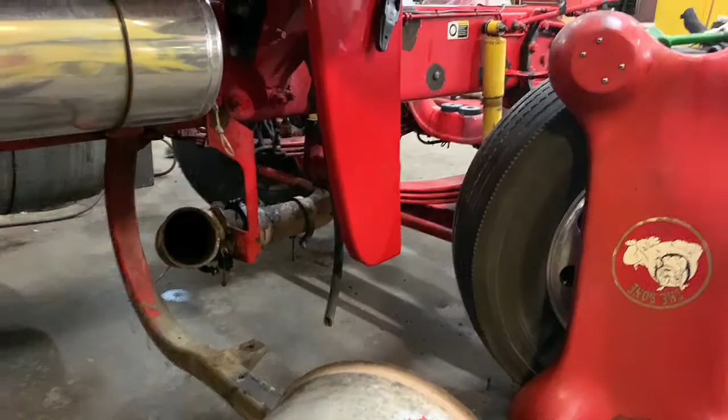Here we go, this is about as bad as it gets. This guy had some major engine problems, which we took care of. We're going to swing around to the front where you'll see he had antifreeze going into it, that red ELC, that's why the red staining there and the plugging and the white clumping.

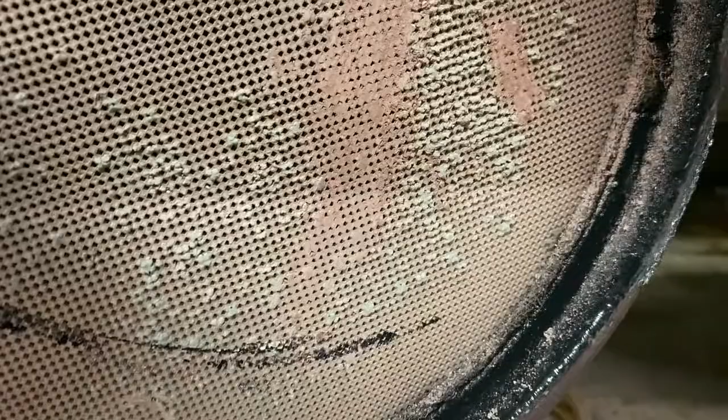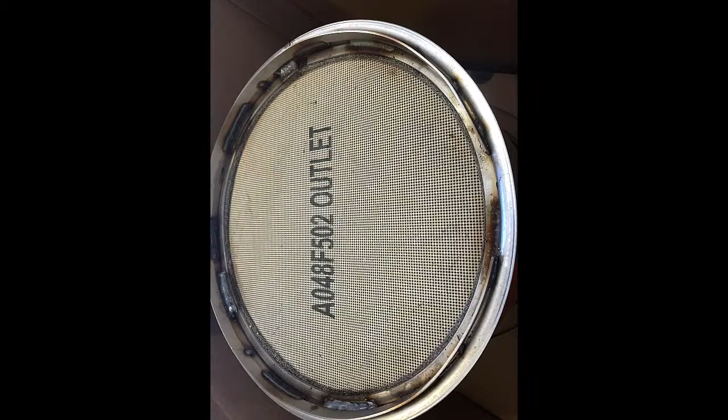We fixed them up. This is what a new aftertreatment element looks like. This one's setting up on top of the outlet can. There's the face of it. It's okay if there's writing on it. It's okay if it's white or pink. It's okay if there's burn marks where the welding is on the edges.

On the top left, the pink, that's what a new element from Cummins Recon might look like. That's fine. The second one down is what you see in the newer trucks like the 2350s and 2450s. They've gone to a different substrate. I think it's much tougher than the other was.

Number 5, which is yellow, is the DPF inlet. It has a lot of oil ash on it. If it cleans up, if you have it cleaned and it cleans up okay and it passes, you could reuse that.

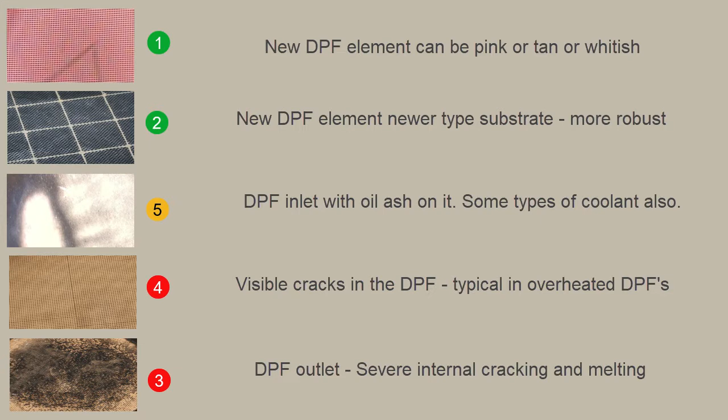Number 4, red's got a crack right across the face of it. You can see that vertical crack. If it's cracked on the face on the outlet, the inside's really bad. And number 3 on the bottom, that's really bad. That's the outlet after we pulled it out, and there's soot staining all over the face of it because the cells are all broken internally.

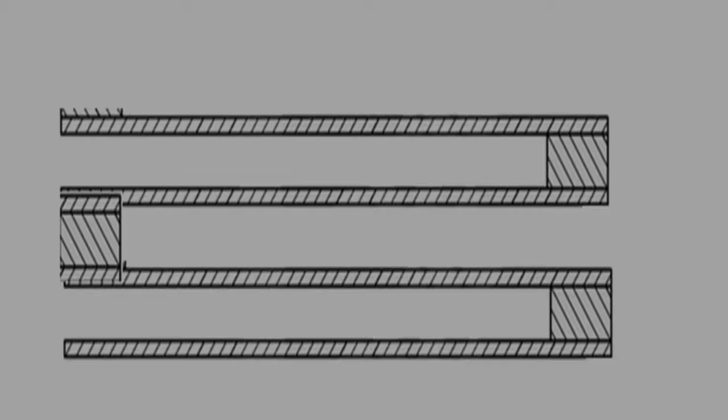This is an illustration of what a good DPF would look like. These are the individual cells, and you can see on the end, they're blocked on one end, open on the other. Those small lines on the sides of walls are the porosity that the gas goes through, but the soot can't. So that DPF we just looked at where the outlet was all soot stained, that's what the cells in this would look like. And you can see on the left, that would be soot particles coming in, but the cell walls are cracked, so the soot particles go right on down and out the other end.

Remember, in a DPF, on both ends, there's open cells and there's closed cells. So if you lay the DPF down, on the left end, all the open cells, on the right end, those cells are closed. On the right, all the open cells, on the left side, they're closed. And that makes the gas go in and exchange through the porous walls. That's how the soot is caught. Here, because of the big cracks, the soot goes right on out.

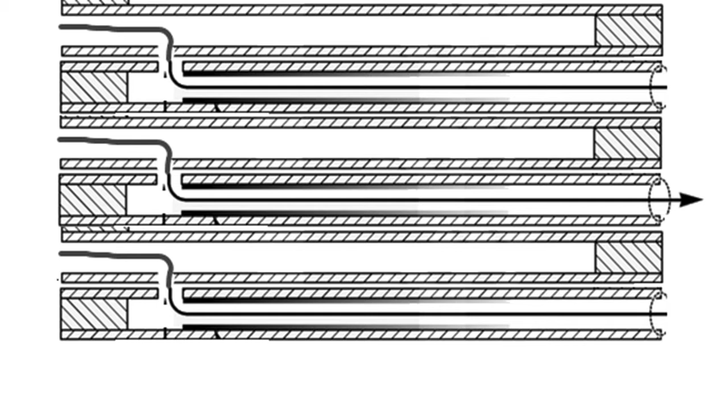So this is called breached. So we just looked at those cracked cells. Let's see what happens that those cells get cracked like that.

So you're running along, and for some reason the engine's making more soot than it's supposed to make. And what happens is the unit's not in a regen, but the exhaust temperatures are hot enough for it to start cleaning itself. So the DOC's warming up because soot touches the DOC and it's fuel, partially burned fuel, and it burns. So the DOC starts making heat when the engine's running smoky.

And then the DPF is loading up quickly with soot. So the system, once it reaches about 850 to 900 degrees, that soot starts to ignite. When you get up to about 1040, it's ready to go. That soot's ready to burn. It's hot enough.

And it will take off, and the engine will try to control the temperature by doing some things with the turbo to cool the exhaust down, to try to cut the oxygen back there. But it happens pretty fast. So I've seen in the fault snapshots, I saw one time 1490 degrees. And if it gets that hot, you're going to have cracked cells happen.

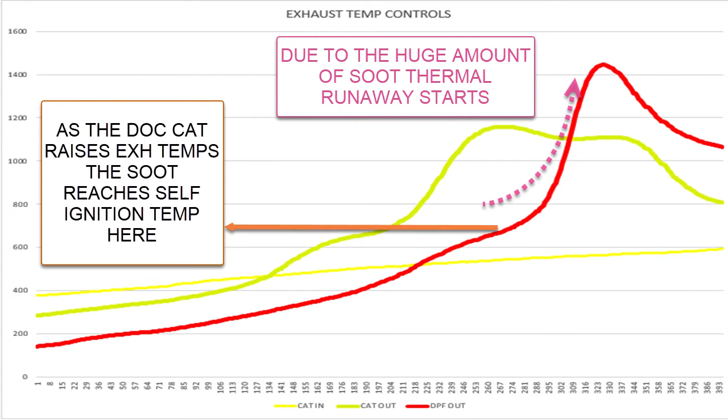So that's why you need to understand what you're looking at when you're inspecting the DPF, and that's why you need to watch those fault codes, because the engine will log faults for exhaust over temperature when this first starts, and if you catch them early, sometimes you can stop from having a very expensive repair.

Okay, what you need to know. On the ISX 871, the 4 fault codes that relate to the DPF are 2639, and that's a fault code that doesn't turn a light on. The ECM has to have a fault code go active for the software to do something or take an action.

So if they want the engine to go into the mode where it will passively regen the aftertreatment by heating it up, and by the way, you usually got to be on the freeway, or I should say going over 45 miles an hour consistently for about 15 minutes loaded to get enough heat in the exhaust system for it to do a passive regen.

If the engine's running properly, it might take a week of running before there's enough soot to change the pressure differential across that element enough where 2639 will go active. Remember, it doesn't drive a dash light. The driver has no idea this is happening. The turbo will do a little change, the fueling will change a little bit, but he won't lose any power.

Some guys can notice the way the engine feels that it's in a regen. The newer engines, they can't even tell really—they've got the software down to a science. But on the older 871s...